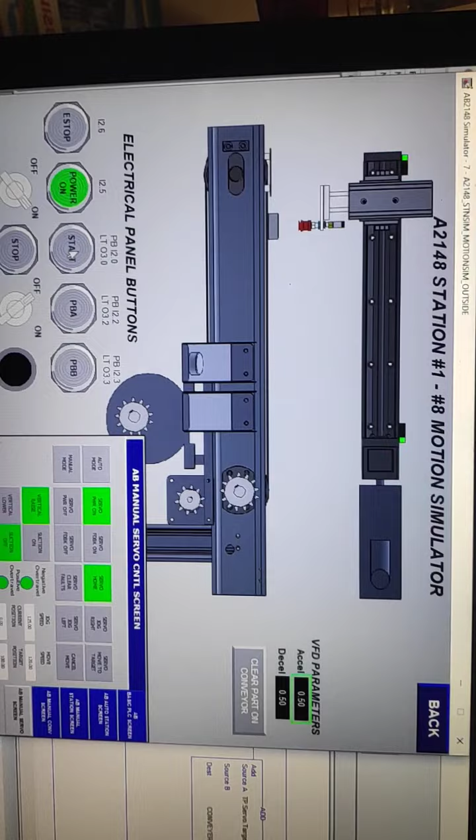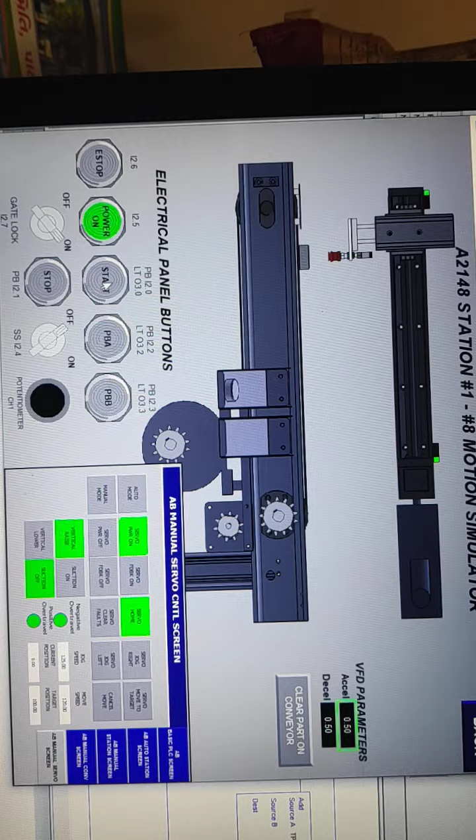So sorry sir, I know that it's not good work, but last week I had just completed Lab 4, so I didn't get proper time to complete all this work because I needed to do the project work, then preparation for the exam and so on. Today was the last paper and I got some time, so some issues were remaining to clear. I just cleared all the issues and I am submitting this video.

So the main purpose of this lab is we need to move this part on the conveyor to this given position, and then when it reaches this position, the servo will turn on, pick up the part and return it to this home position.

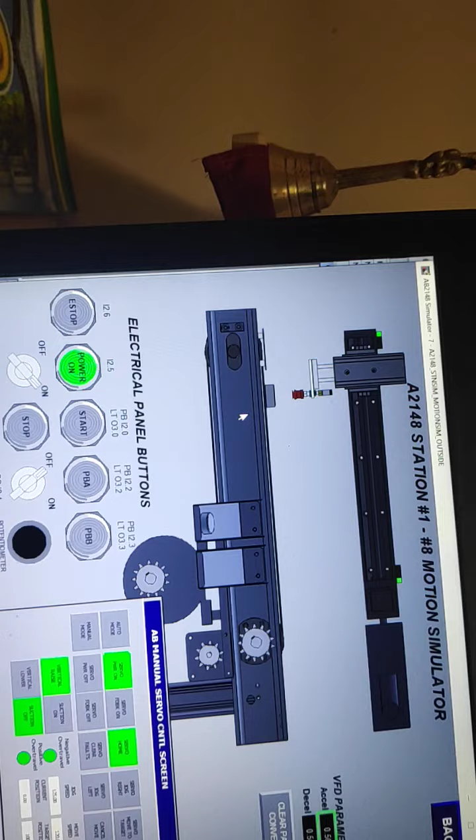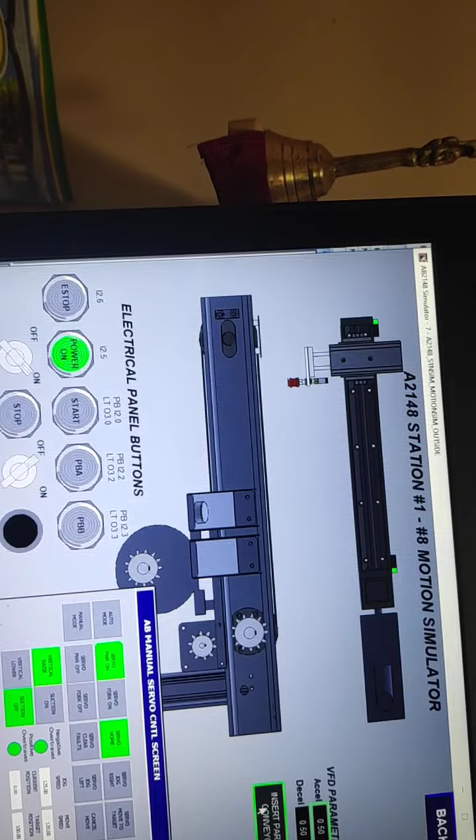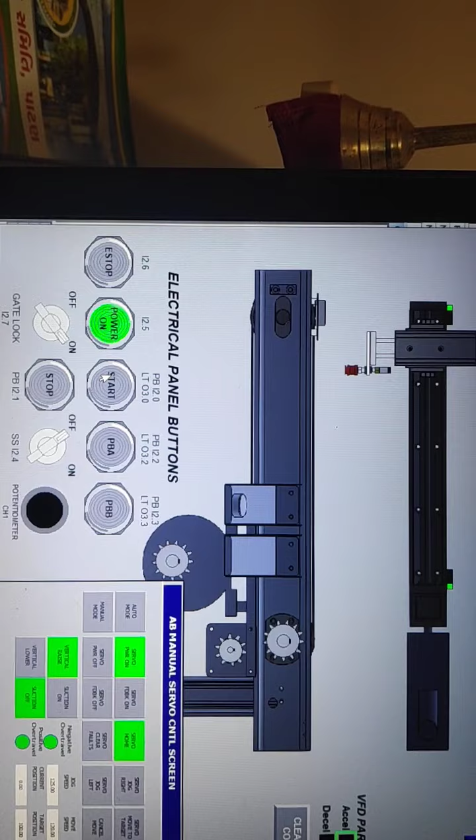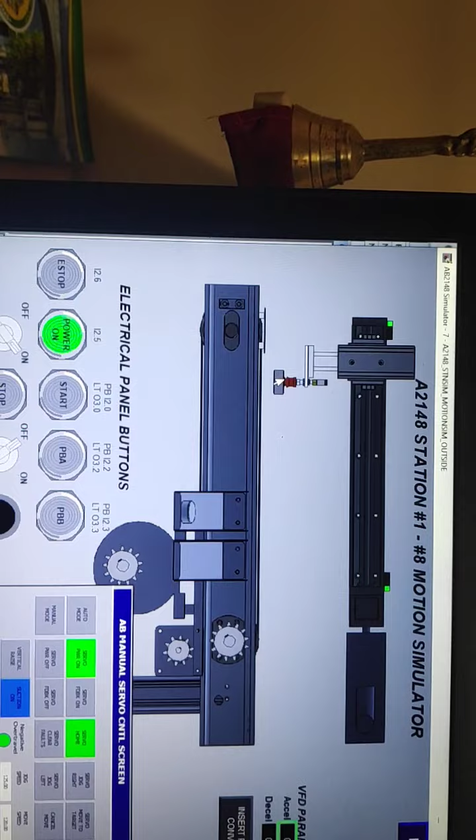So at the starting point I am doing the homing sequence. Now the home is clear, so I am clearing the part and once again inserting the part. As I have set this position to 100 mm, I am pressing the start button. When I press the start button, the conveyor moves to 100 mm and remains here for 1 or 2 seconds as I put the timer there. Then the servo will come here to pick the part and put it on this home position.

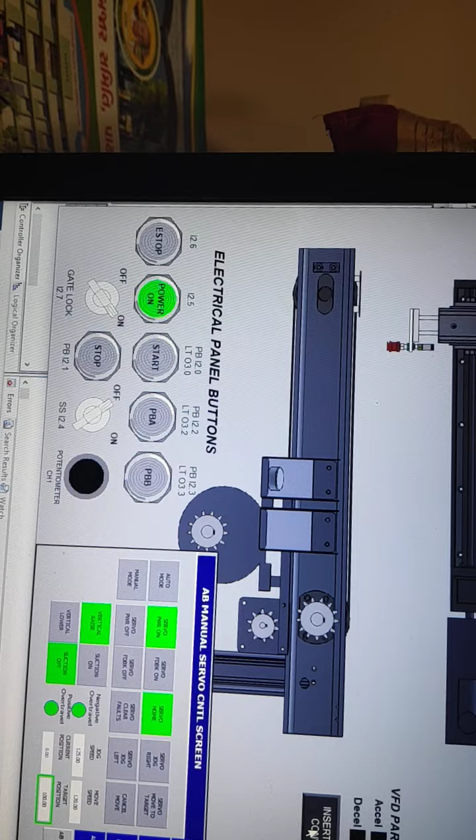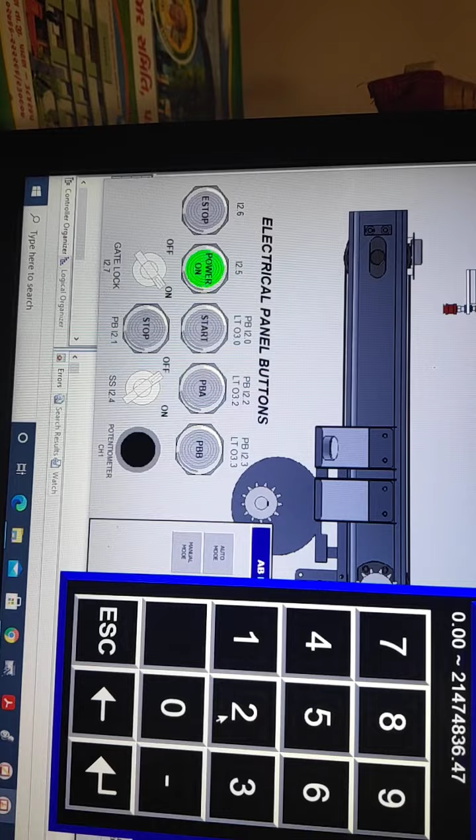Now for changing this position, first of all we need to do homing. So I am doing the homing condition, and the homing condition will turn on. Now it's done, so clear the part and insert the part. At this time we can see that all these conditions are true, and I am changing this 100 to 200, enter, and now pressing the start button.

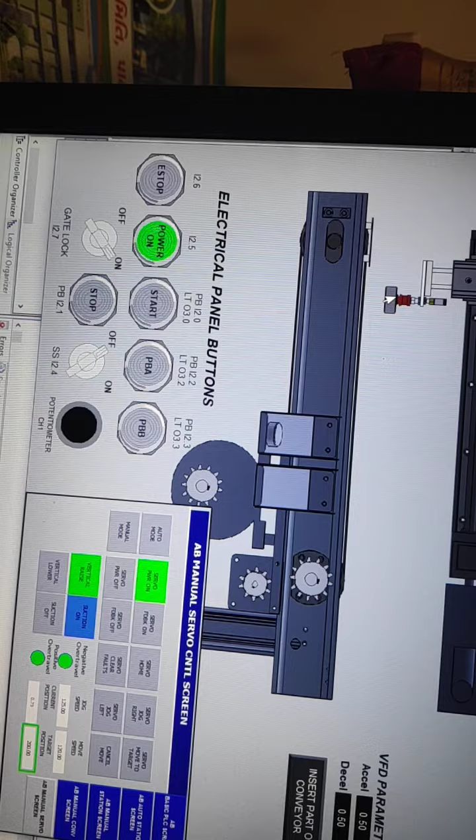When I press the start button, it moves to the 200 position, and for 2 to 3 seconds it will stop here. Then the servo will turn on, the suction will pick up the part and return it to the home position. In this way, task 1 is working. Now I am going to explain how I made this program.

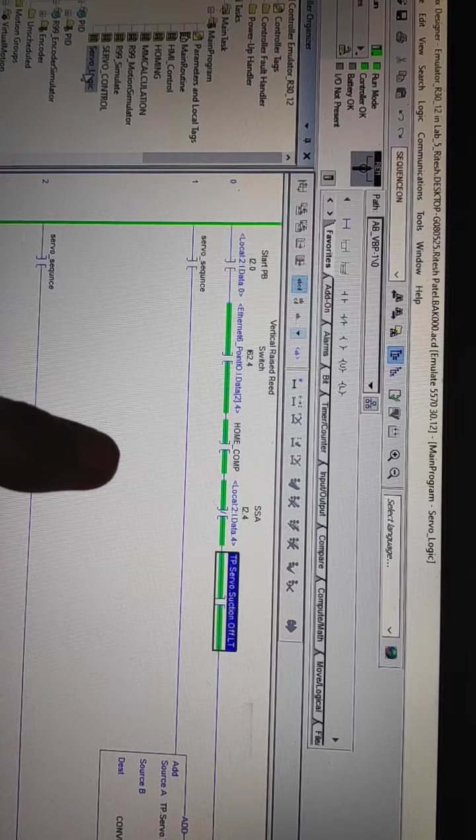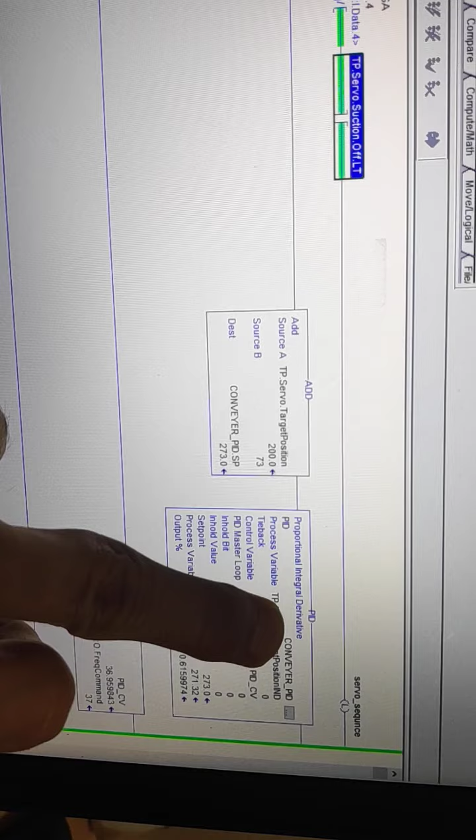We can see that the servo sequence will turn on when we press the start PB, the vertical reed switch is on, homing is completed, the SSA is off, and the TP servo suction light is off. When the servo sequence turns on, it will add 73 into the servo target position. The 73 is the offset which will move to the conveyor PID SP point, and then the PID block will be initiated. It will give the absolute value from the CV point to the VFD frequency command, which is our speed command.

Now for back and forth, the VFD will move forward when PID CV is greater than or equal to 0, and it will move reverse when PID CV is less than or equal to 0. Now after that, the step sequence will turn on, which I will explain later.

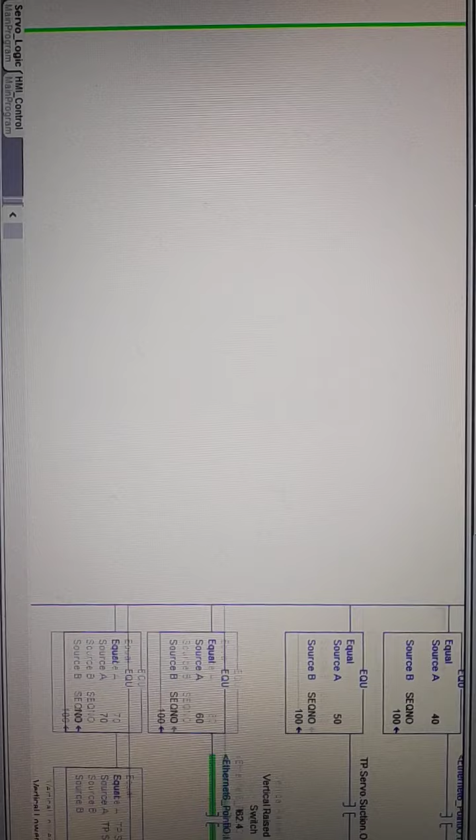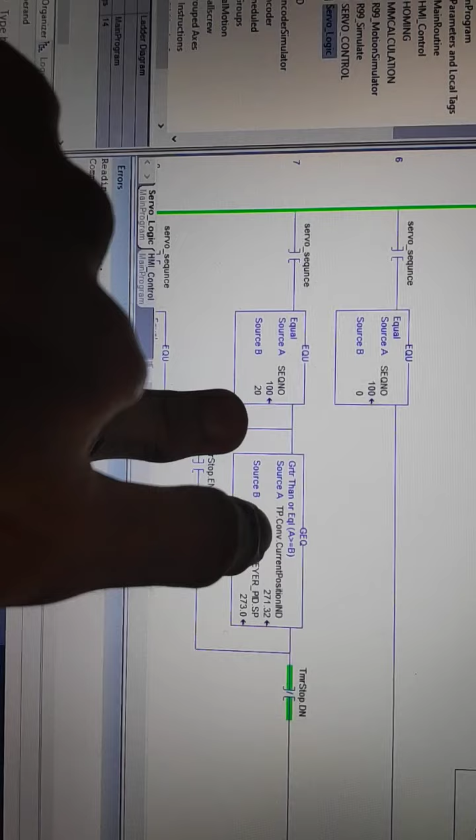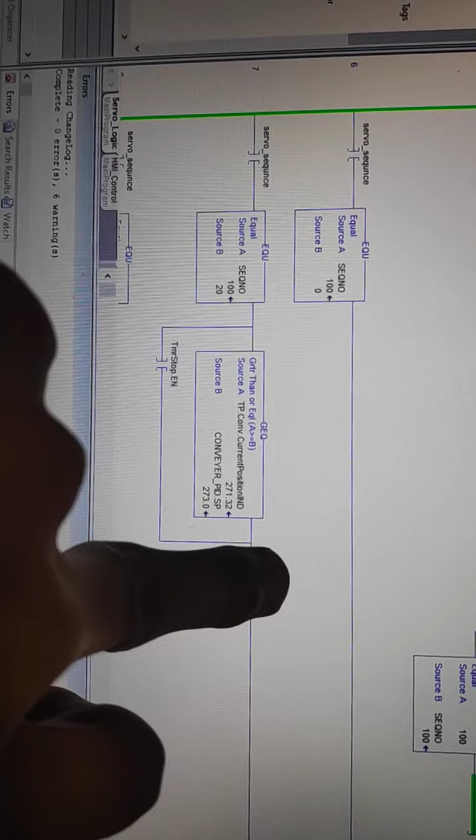Let's see this step. When it is in step number 0, the conveyor will start. Then in step number 20, it will stop the conveyor when the current position indicator is greater than or equal to the PID set point, and I have put a timer here for 3 seconds. When this timer is done, it stops the conveyor, as the part reaches its target position. Now in step 30, the servo will reach its target position.

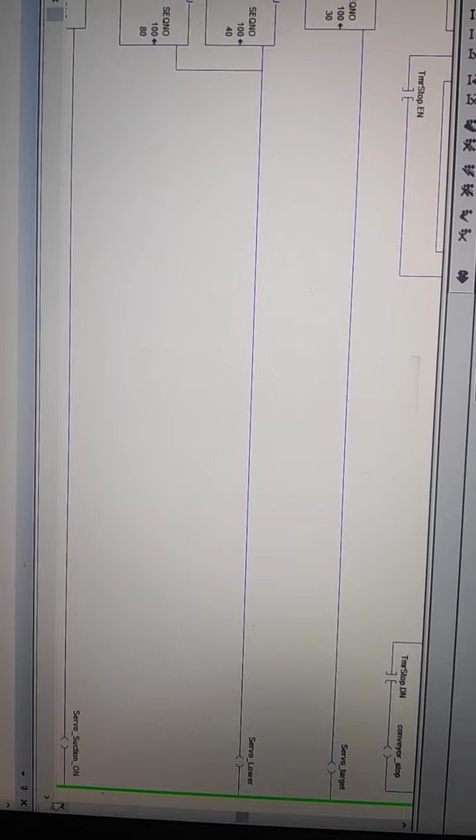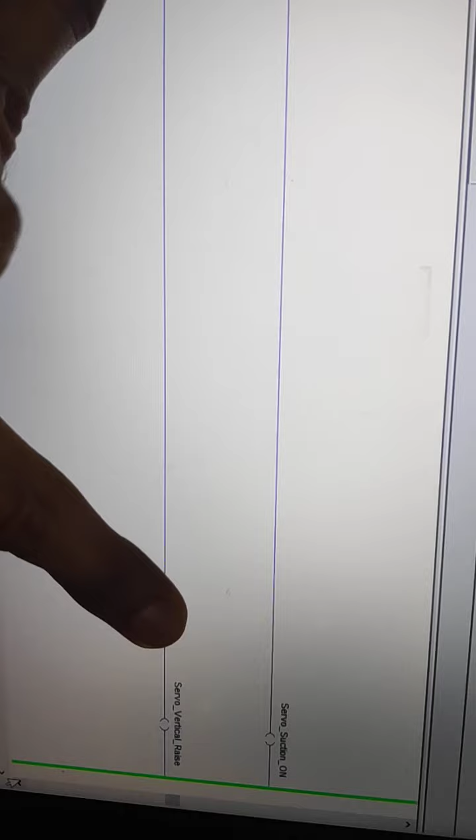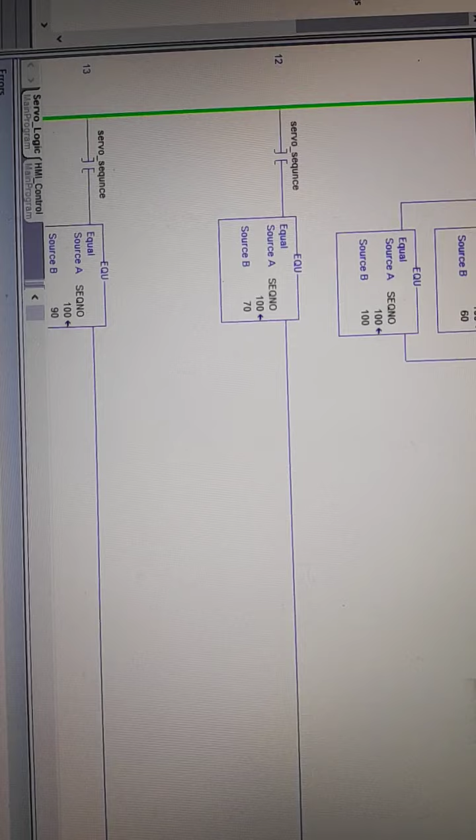In step 40 as well as step 80, the servo goes lower, and after step 40 it moves to step 50. In this step the servo suction will turn on and it picks up the part. Then in step 60, the servo vertical is raised to return the part to the home position, and it also raises when the process is completed, in step 100. In step 70, it will initiate the motion axis move to part pickup. And in step 90, the servo suction will turn off.

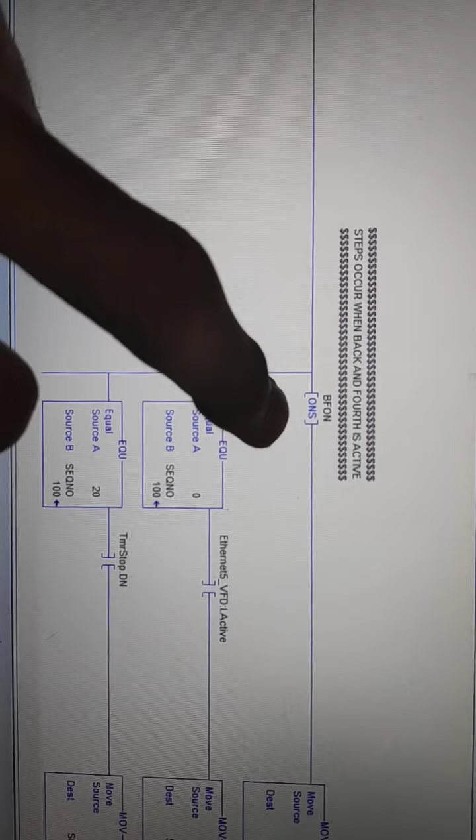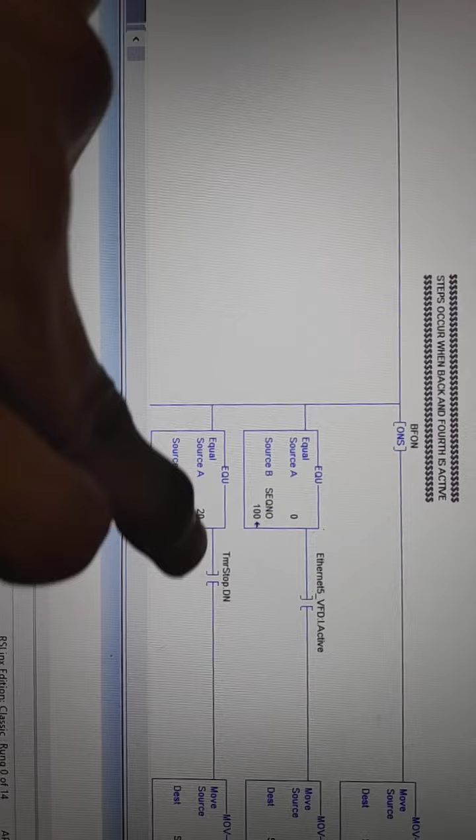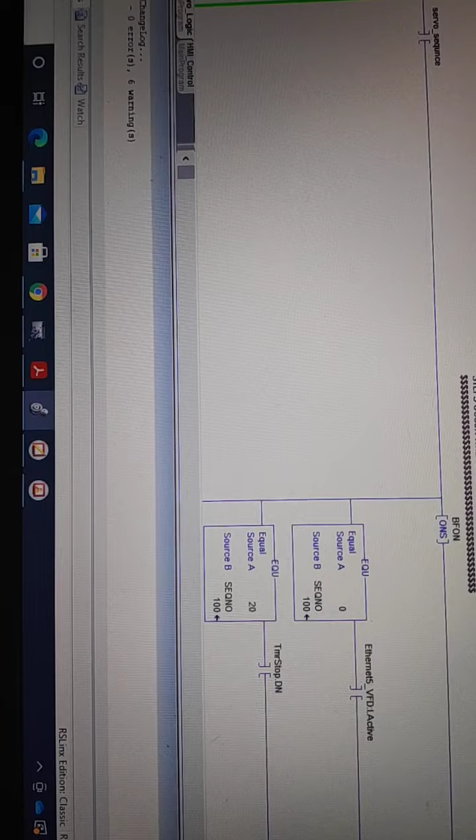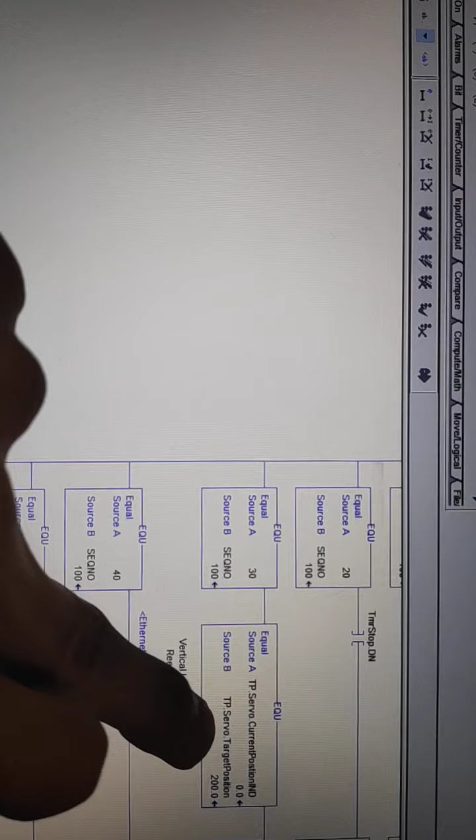Now let's see this part. At first the one shot will start. At this time our servo is in step 0. When it is equal to 0 and the VFD is active, it will move to step 20. When it is equal to step 20 and the timer which I put in step 20 is done, the servo will go to step 30. When the step is equal to 30 and the servo current position is equal to the servo target position, it moves to step 40. At this time the servo has reached the conveyor position.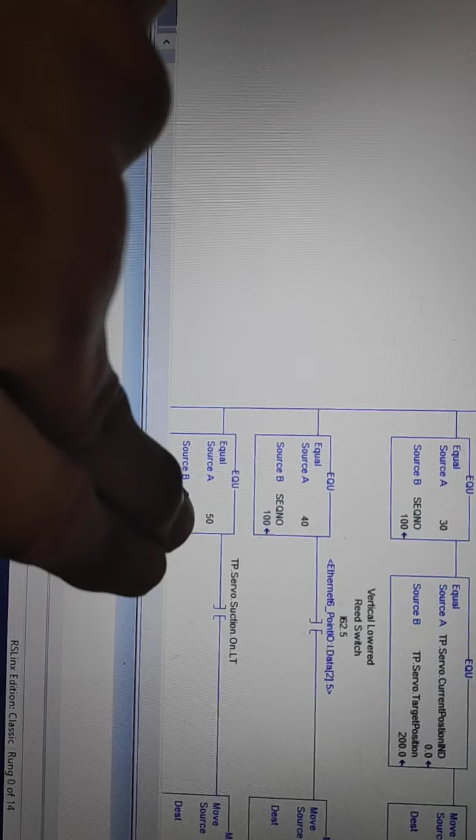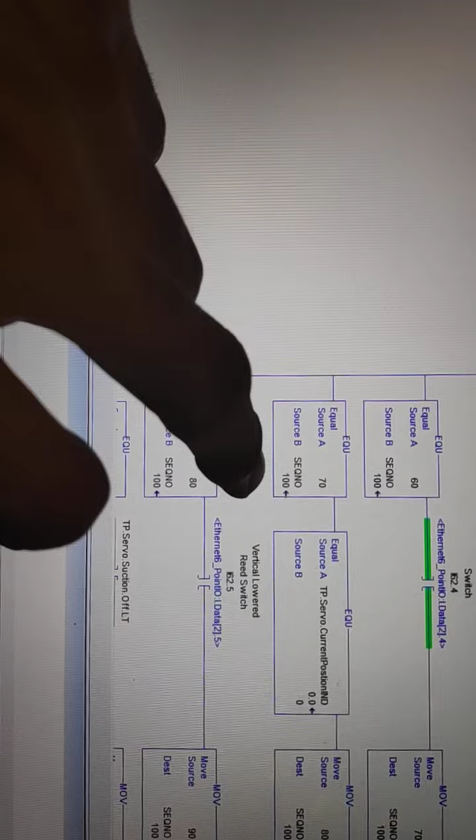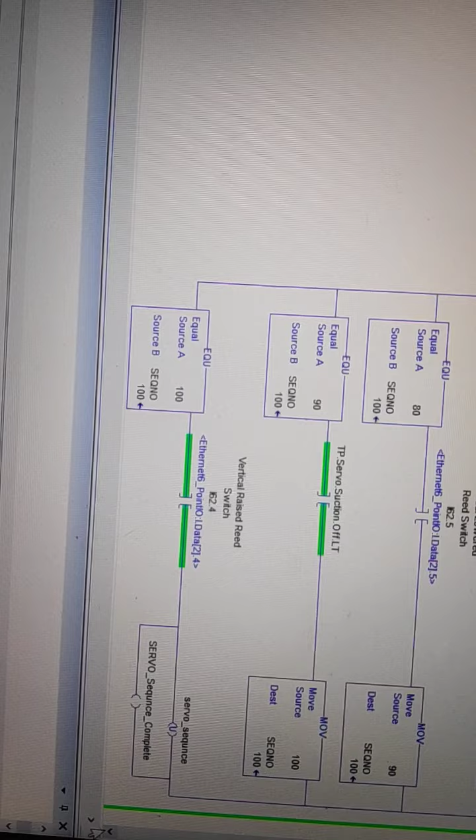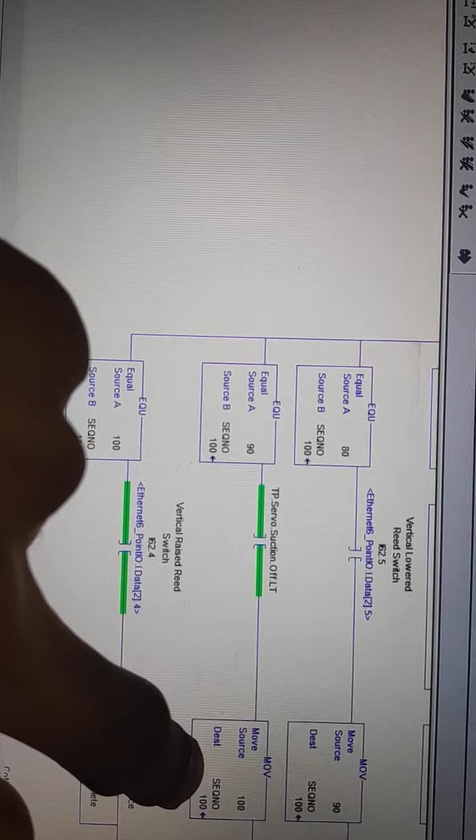In step 40 the vertical lower reed switch is on, and then it moves into step 50. In step 50 the suction light will turn on, and then it goes into step 60. In step 60 the vertical raise reed switch will turn on, and then it moves to step 70. In step 70, when the servo current position is equal to 0, it will move to step 80, meaning it comes to the home position. In step 80, the vertical lower reed switch turns on, and then it moves to step 90. In step 90, the suction light will turn off, so it puts the part on the conveyor and moves to sequence number 100.

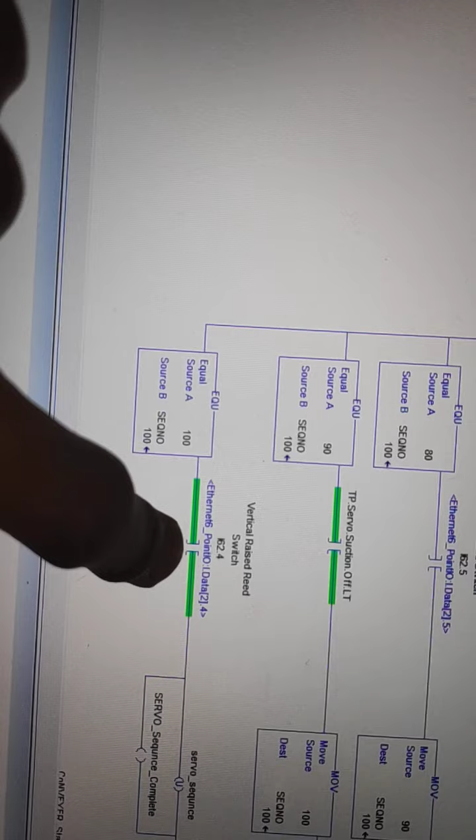At the end, when it is in step 100 and the vertical raised reed switch is on, the servo sequence is unlatched and it shows that the servo sequence is completed. So this is my lab 5 task 1 program.